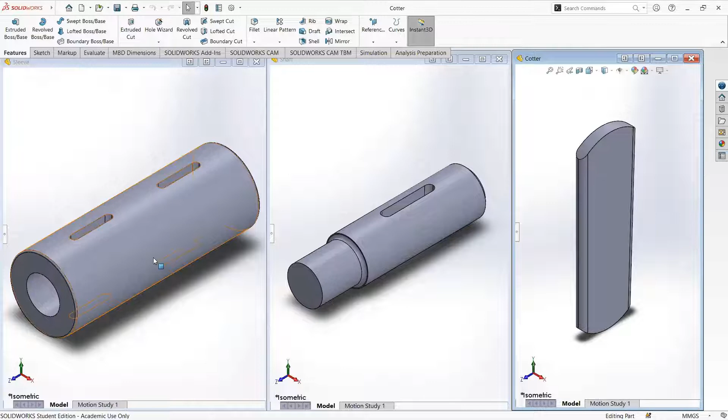Hi, in this video, I'm going to explain how to create the assembly model of sleeve and cotter joint from its part models using SolidWorks. We have already created the three part models: sleeve, shaft and cotter.

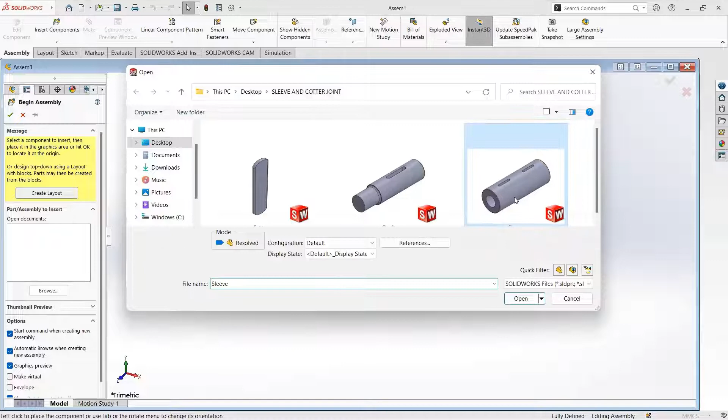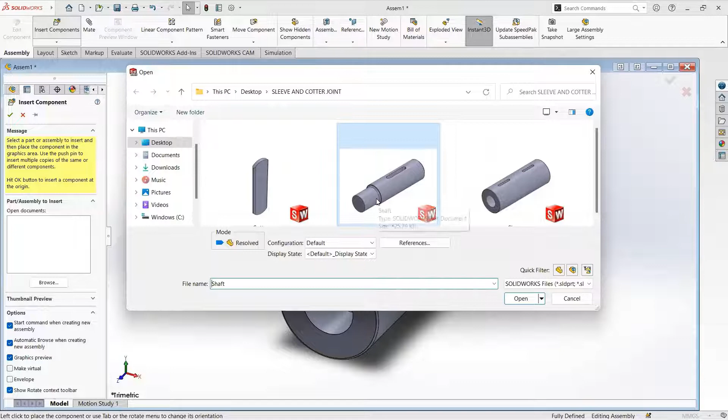To begin the assembly, go to New, select Assembly and click on OK. I select here sleeve, which will act as the base part. Open and click. Now under assembly, go and click insert components, and you may call upon the second part now. I call here shaft. Click.

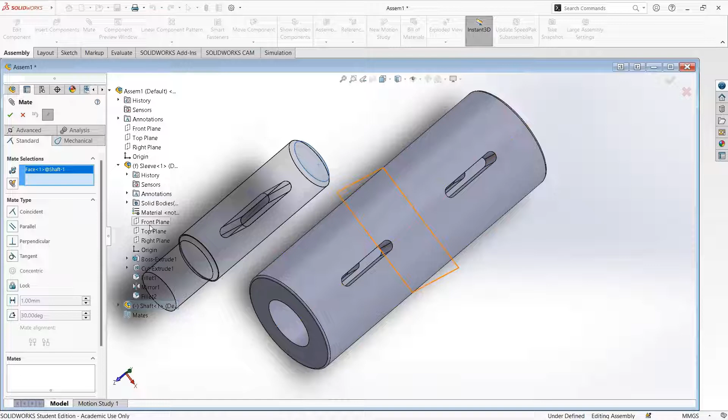Go to mate, select this surface and the mid plane of sleeve. To select the mid plane of sleeve, go to sleeve, open the tree and select the front plane. Okay, you can see in the top view clearly this surface and the mid plane are coinciding each other. Now click on the tick mark.

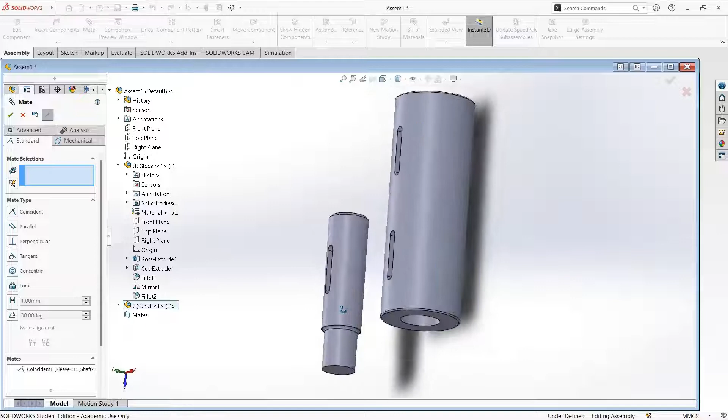Alright. Now click on concentric, select this cylindrical surface and this internal cylindrical surface. This part is coincide properly, meaning the assembly of these two are done correctly. You can even verify by seeing this slot.

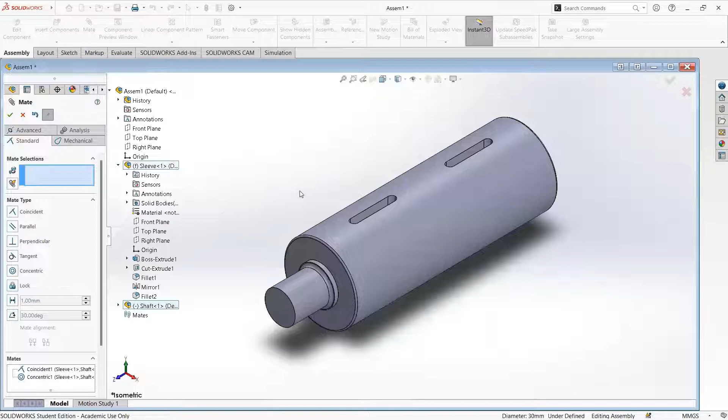Now we'll call the third part. Under assembly, click on insert components. Now we'll insert the cotter. Click on cotter file and click on open. The object is here. Now we may click on mate and select coincident. Now we have to select two faces.

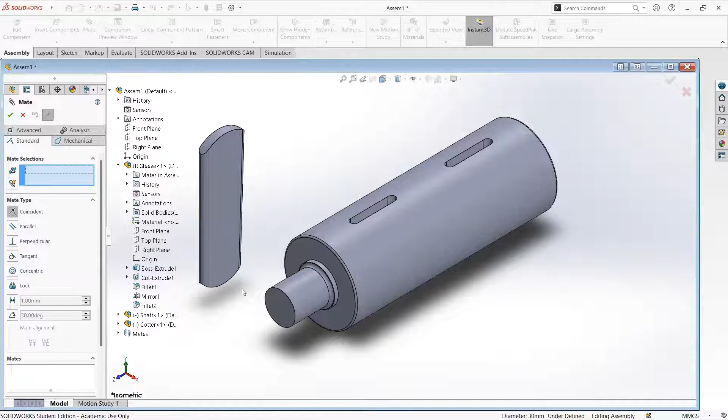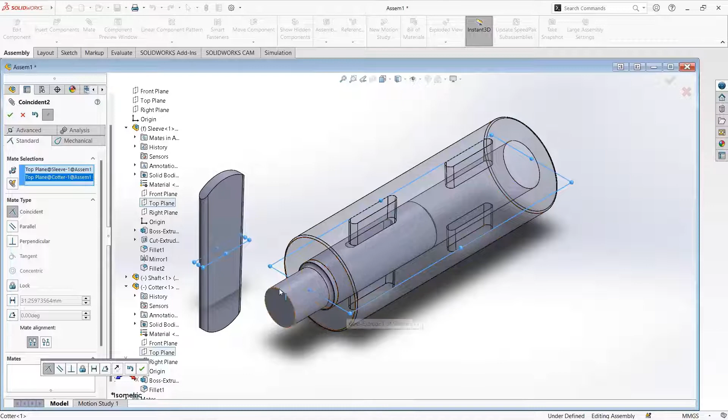Now we may select the planes, go to sleeve and select the top plane. Similarly, go to cotter and select the top plane. Now these two planes are coinciding with each other. This means that the cotter is positioned exactly in the mid plane of the sleeve. Click on OK.

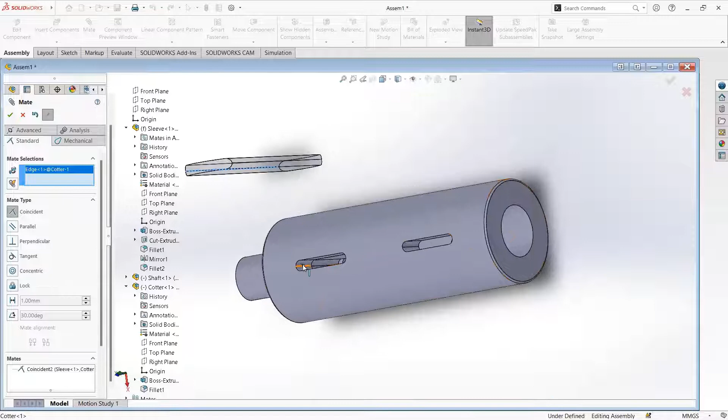Next, we select coincident and select this line, okay, this edge and the edge inside. Now the cotter pin is positioned correctly.

Now we have to insert a shaft here and cotter pin here. Instead of doing separately, we can mirror the shaft and the cotter so that they will be added here. For that, select cotter and shaft by pressing Ctrl key. These two are selected now. Now go to linear component pattern. Under that there is an option mirror components. Click on it.

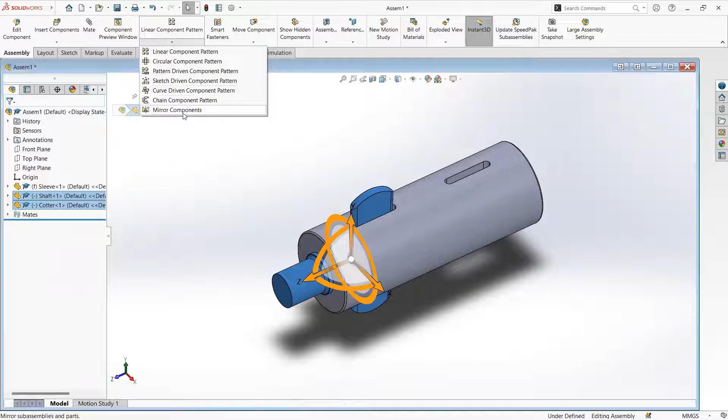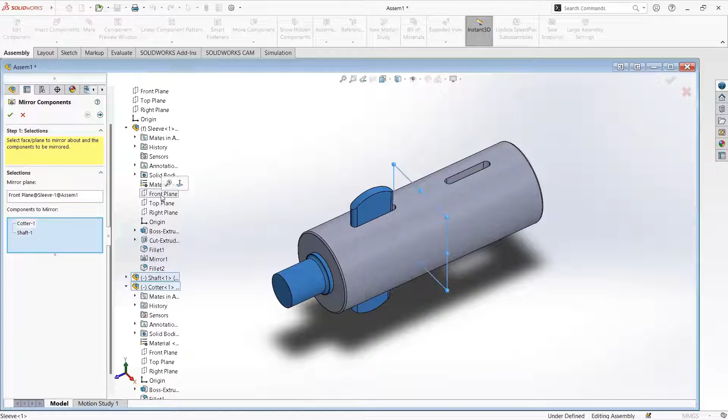Cotter and shaft are already selected. Now we have to select a mirror plane. To select the mirror plane, go to sleeve and then select the front plane. Click on it and click on OK. These two are mirrored here. Now the assembly of cotter pin is complete.